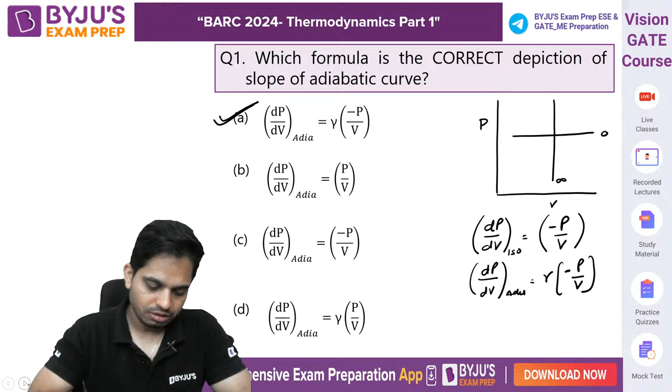In an isentropic process, the pressure P of the gas varies with temperature. We have an isentropic process, and it is saying pressure and temperature are related as P equals K T to the power 5 by 2, where K is a constant. What is the ratio gamma?

Adiabatic is also called isentropic? No. Reversible adiabatic is called isentropic, not just adiabatic. You cannot call adiabatic isentropic by itself; it is not isentropic. Reversible adiabatic is isentropic, got it?

So I have to find out gamma. Now how do you find it out? I know that for an isentropic process...

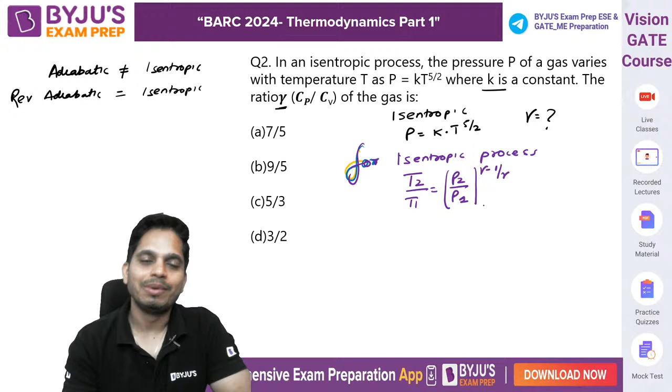For an isentropic process, what is the relationship between pressure and temperature? Can I write T2 by T1 equals P2 by P1 to the power gamma minus 1 by gamma? This is the relationship. So can I also write P2 by P1 equals T2 by T1 to the power gamma upon gamma minus 1?

So this can be written as P equals K T to the power gamma upon gamma minus 1. Now if I compare my equation A and B, I can equate gamma upon gamma minus 1 equals 5 by 2. Yes, you can do that.

So gamma, how can I find it out? 2 gamma equals 5 gamma minus 5. So if I write 5 gamma minus 2 gamma equals 5, then gamma equals 5 by 3. What is the answer? 5 by 3, the answer is 5 by 3.

Yes, clear? Guys, please contribute. Clear?

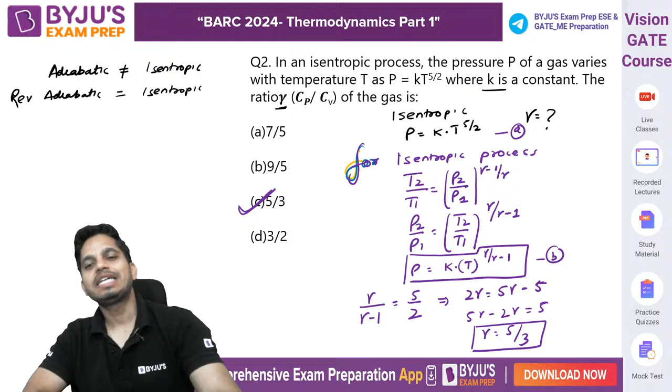We have just seen the ratio of absolute temperature T2 by T1 at two different states in an adiabatic process. What is the correct option? Just now we have seen this - how T2 by T1 is related to P2 by P1 for adiabatic process. Although this question is not absolutely correct, it should be reversible adiabatic. So how is it related? Gamma minus 1 by gamma, that is option B.

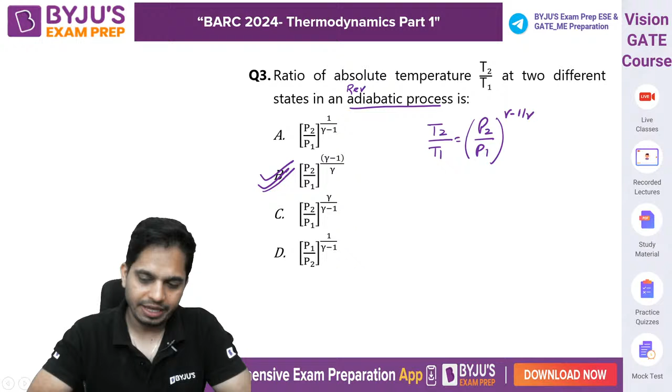Next question. A piston of diameter 0.1 meter expands over a stroke of L equals 0.2 meter under constant gas pressure of 2 into 10 to the power 5 Pascal, that is Newton per meter square. You have to find out the work done by the piston. So very simple, work done for isobaric process is P into change in volume.

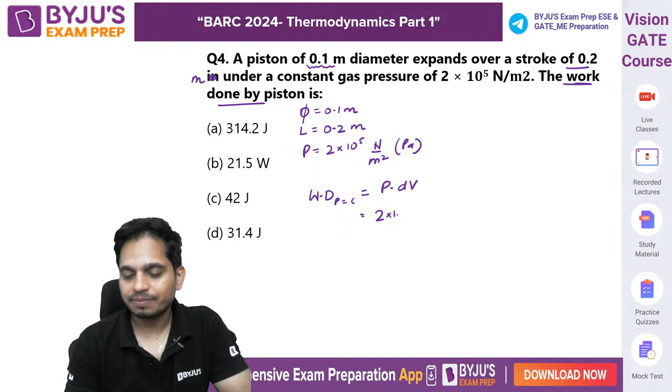P into change in volume. Now pressure is already given to me. How can I write change in volume? By area of piston and the distance that it has traveled. So area is pi by 4 into phi square into length. So the answer you will get is 314.2 joule is the work done in this process. Very good.

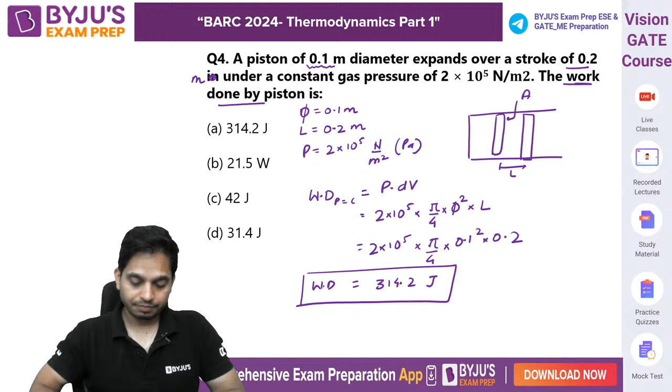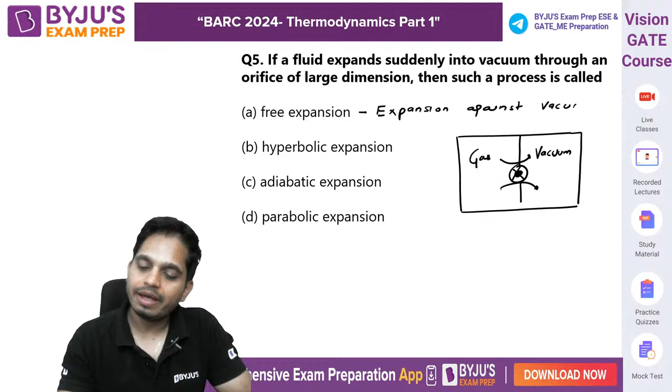Let's move on to the next question. Very simple question: if a fluid expands suddenly into vacuum, this is what? Expansion against vacuum through an orifice of large dimension. So let us say I have an orifice here, here we have gas, here we have vacuum. So what do you call this process? Free expansion - expansion against vacuum. If I open this orifice and gas expands against vacuum, it is called free expansion.

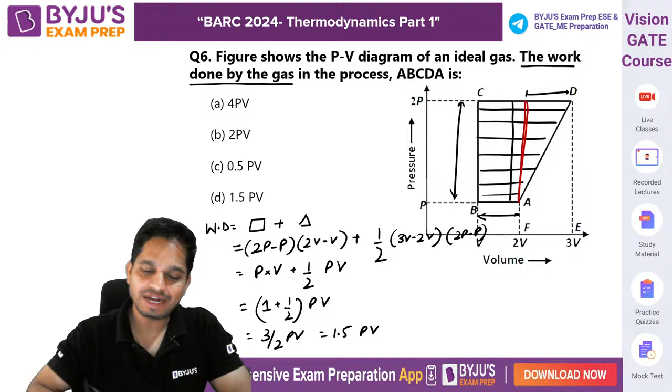What is the area of triangle? Half base into height. So base is 3V minus 2V and 2P minus P, so this is also half PV. So that is 1 plus half PV, 3 by 2 PV, 1.5 PV. Yes, 1.5 PV is the correct answer. This is the correct answer.

The work required for compression in a closed system increases - if work of compression you have to increase, then what is the relationship with N? You can do it two ways. You can write the formula: work of compression equals P2V2 minus P1V1 upon 1 minus N. Either you can do it like this, or you can draw a PV diagram as well.

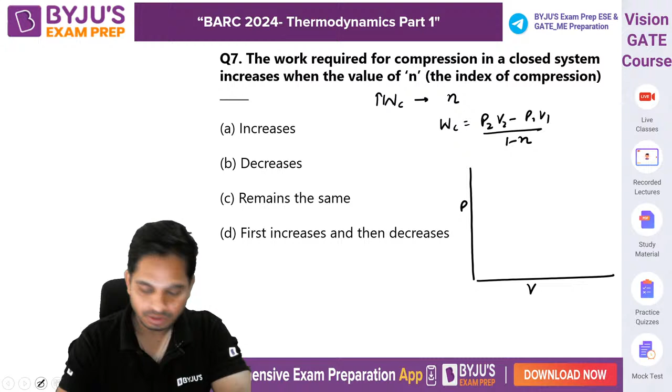What is the compression quadrant? This is the compression quadrant. And how do you give compression work? Area below the curve. So if I increase N, you see, N is giving me slope. If this has a lower slope, that means lower value of N. But if I increase the slope, then I will have this area. Higher N means higher area below the curve, means higher compression work, you have to give higher compression work.

So if N increases, work or area under the curve increases, that means compression work increases. So you can say it like this, or you can say if N is increasing, this whole thing is going to decrease and compression work is also going to increase. Got it? You can see it either way. Clear?

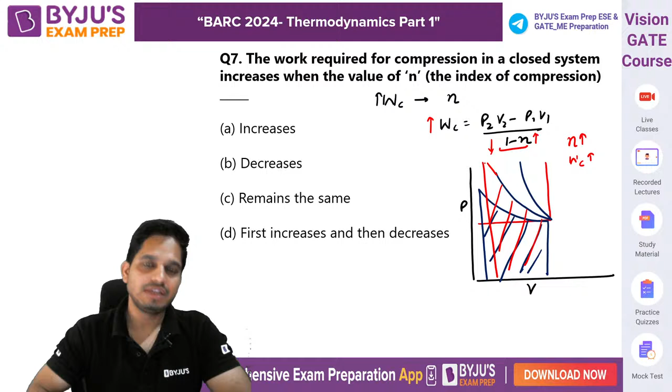Quickly, a PV diagram is given. This is the pressure-volume diagram. I have to tell what is the correct option in the PT diagram, in terms of pressure-temperature. Which option is correct? And this process AB is given as isothermal.

So very simple concept. If I have to draw a pressure-temperature diagram, then I am sure about one thing: BC will be a horizontal line, and AB will be a vertical line. Then only temperature will remain constant, and here pressure will remain constant. So if any diagram is satisfying this condition, you can say that is the correct PT diagram.

Is it clear? So which option is satisfying this condition? Option C. You see, B to C is constant pressure and A to B is constant temperature. Here A to B I cannot draw like this, this is wrong. Similarly, in other options A to B is constant pressure again, so this is not correct.

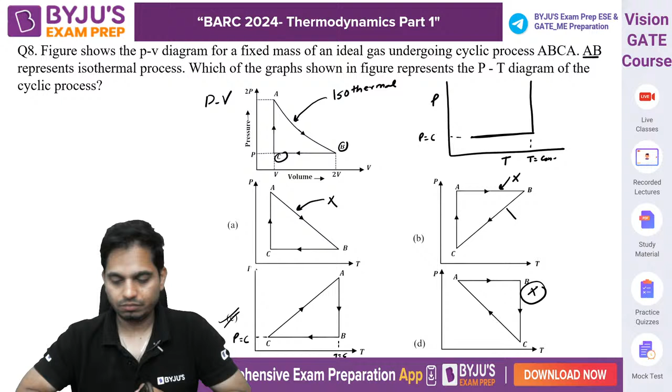Chalo. The ratio of specific heat at constant pressure to the specific heat at constant volume for a triatomic gas - basically it is asking, sir tell me gamma for a triatomic gas. Can you tell me? I hope that you know...

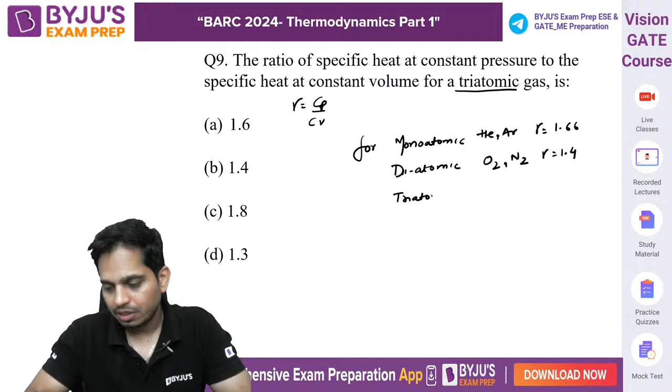...that for a monoatomic gas - for example helium, argon - gamma is equal to 1.66. If you have a diatomic gas, for example O2, N2, gamma is equal to 1.4. And for triatomic, for example ozone, CO2, gamma is equal to 1.33.

So what is the right option? D is the right option.

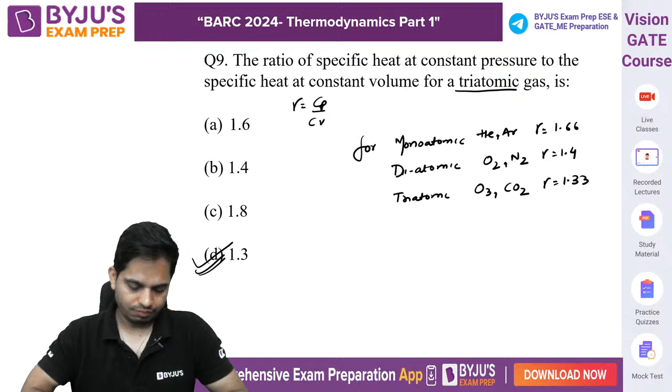Charles law. What does Charles law state? What does it tell you? Charles law gives you the relationship between volume and temperature at constant pressure, and it tells you that volume by temperature is constant.

So which option is correct? D is correct. Very good.

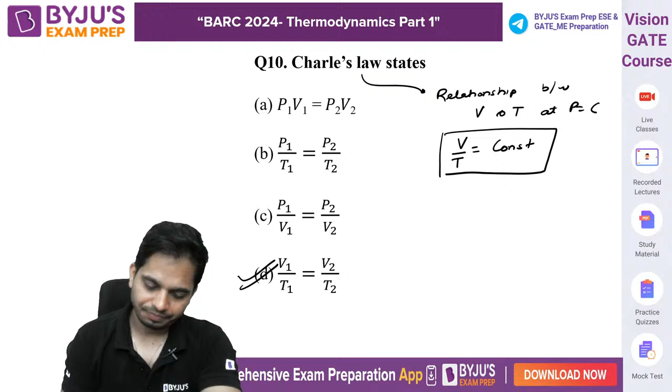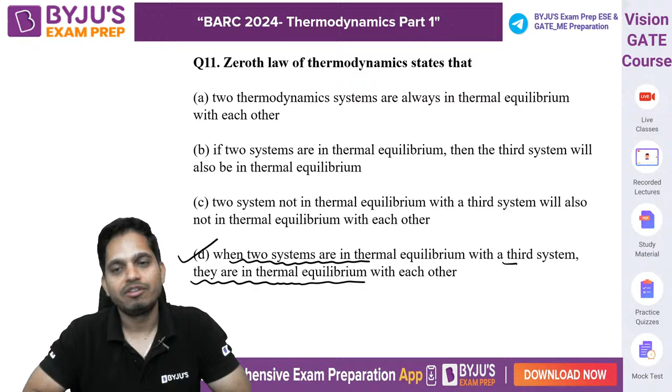Okay, chalo. Change in enthalpy in a closed system, that is DH, change in enthalpy, is equal to heat transferred if a reversible process takes place at what - constant pressure, temperature, volume, or internal energy?

Yes, D is correct in the last question. What is correct here? It is true for constant - constant what? It is valid for constant pressure. And dU is equal to dQ for constant volume.

Yes or no? You should know this, guys.

Internal energy associated with kinetic energy of molecules is - nuclear energy, chemical energy, sensible energy, or latent energy?

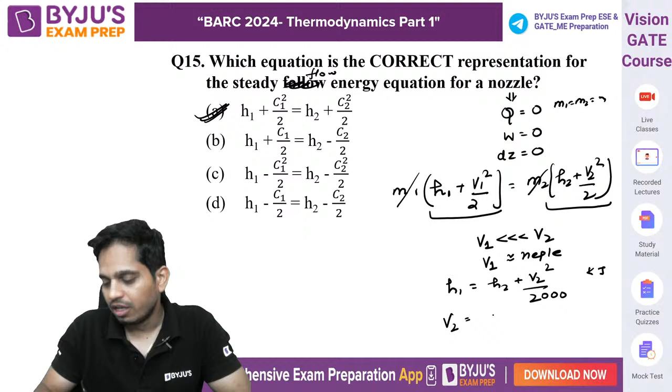So V1 can be neglected. So I have H1 is equal to H2 plus V2 square by 2. So V2 is equal to, now if I need to write this in kilojoule, then I have 2000 here. So it will be 2000 times H1 minus H2. So I can write it directly: V2 is equal to under root of 2000 times H1 minus H2. So 2000 into 0.2 is equal to 400, is equal to 20. What is the answer? 20 is the answer.

Yes? Yes. Chalo, next.

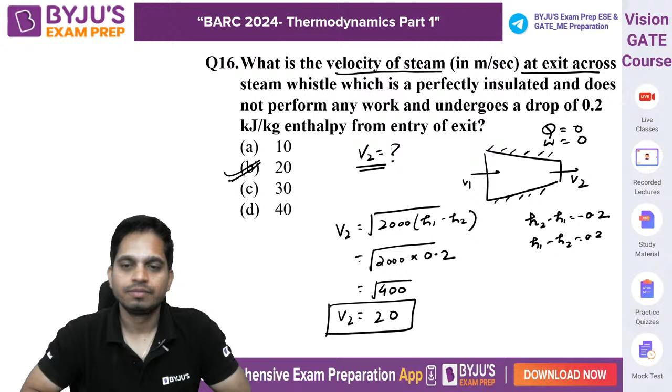Which gas can attain the highest efficiency for the same compression rise? For same pressure rise, highest efficiency. So how will you get highest efficiency? By efficiency is equal to work output upon heat input, so if work output is max, if you increase work output, efficiency will increase. Now, how will you get work output?

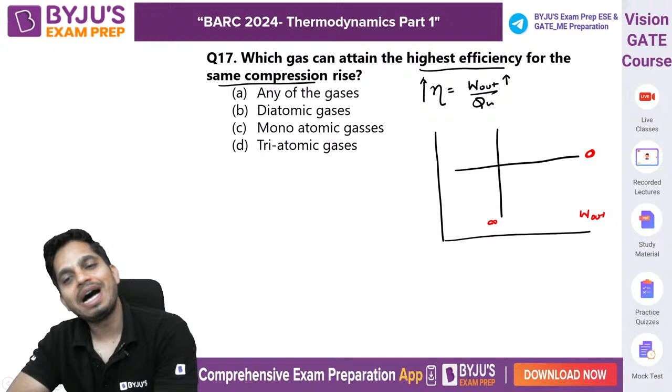Work output can be seen by the curve. You see, here slope is 0, here slope is infinite, and this quadrant will give you work output because it is expansion. Now, yes, monatomic is correct, very good. So if the slope is high, now slope is increasing in this direction. So as you can see, this will be your monatomic gas.

What is the value of N for monatomic gas? It is 1.67. For same compression rise, it is saying, okay, for same compression, so basically you need minimum work.

Yes, so basically we will see it here: 0 to infinite, and as you can see, if the value of N is maximum, the work will be maximum. We have already seen this. If the value of N increases, work increases. So if the value of N is maximum, which is maximum for monatomic gas, for diatomic it is 1.4, for triatomic it is 1.33. So as you can see here, you will get the maximum one as monatomic, so you will get C as the option, C will give you maximum work output.

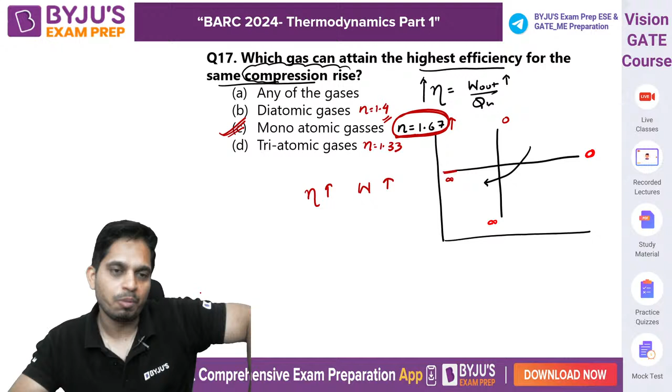Okay, chalo, next: isothermal compression is the most efficient but is not practical. We have already seen isothermal compression is the most efficient. Why? Because you need to give minimum work. Compression is this side. In the PV diagram, this is constant pressure, this is constant volume, this is isothermal, and this is adiabatic.

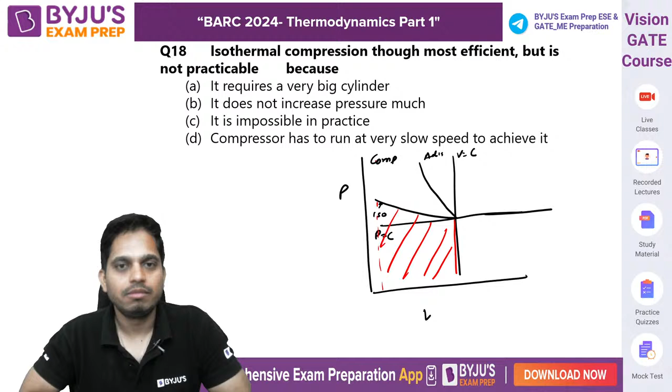Now in isothermal compression, we have to give minimum work. This is minimum area, so minimum work is needed. So isothermal compression is always most efficient because you have to give minimum work.

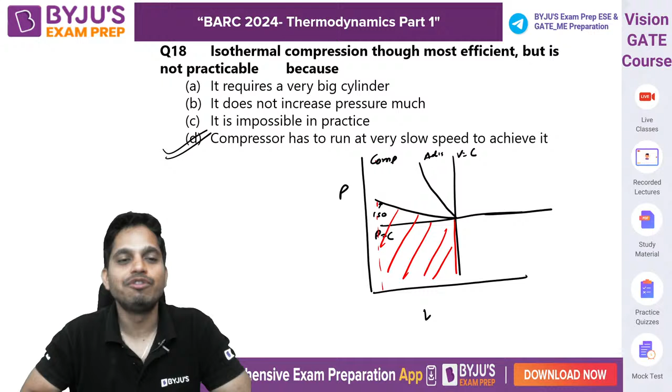But why can't we use it? Because isothermal process is done in a very, very slow manner, so that no friction will be there. If you move your piston faster, friction will be there and the process cannot be isothermal. So you do isothermal process at infinitely slow speed, and that is not practical in actual systems. If you want isothermal, the compressor has to run at very slow speed to achieve it, which is not practical.

For a given system, if heat is added, heat is denoted by Q and work is denoted by W, then what is the cyclic integral of dq minus dw? Cyclic integral for a closed system will be what? Quickly.

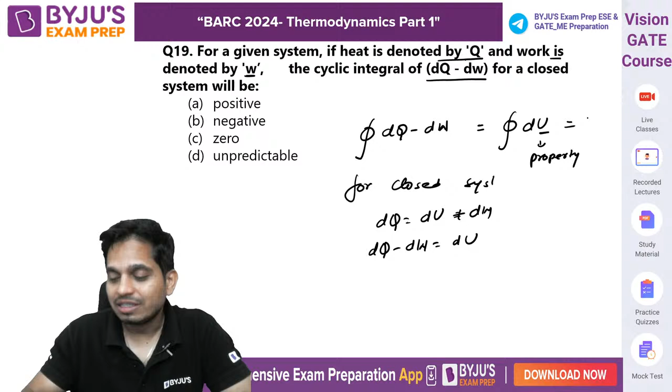It is 0. Why? For a closed system, we know that dq equals du plus dw. So dq minus dw equals du. So I can write it as cyclic integral of du. And u is a property. Change in property for a cycle is 0. We know this, right?

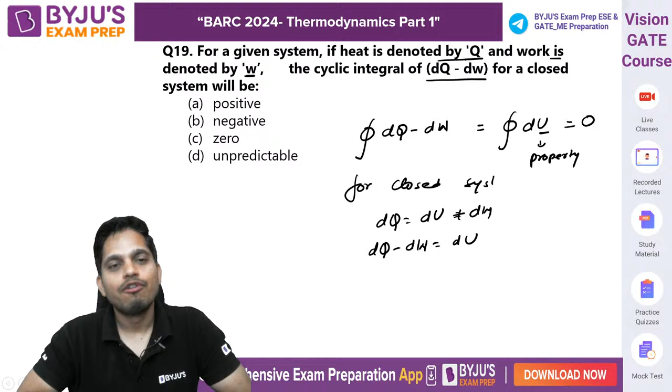Clear? If they ask for a process, then what will be the integration of dq minus dw? For a process, not for a cycle. What do we know? We know that dq is always greater than dw. This is your second law. You have to give more heat. dq is always greater than dw, and therefore this integration will always be positive. But this is for a process, not for a cycle.

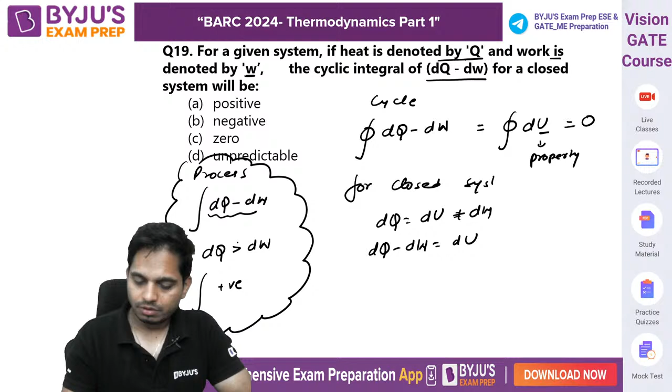So for a cycle it is 0. A liquid of mass 1.5 kg and specific heat 3 kilojoule per kg Kelvin is stirred, causing the temperature to increase by 10 degrees Celsius. What is the work done for the process if the system is insulated? That means there is no heat transfer.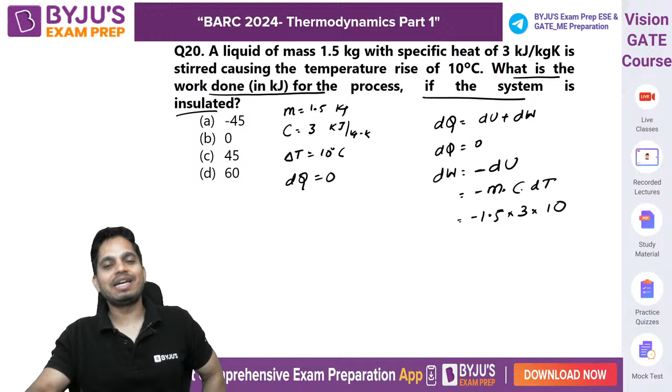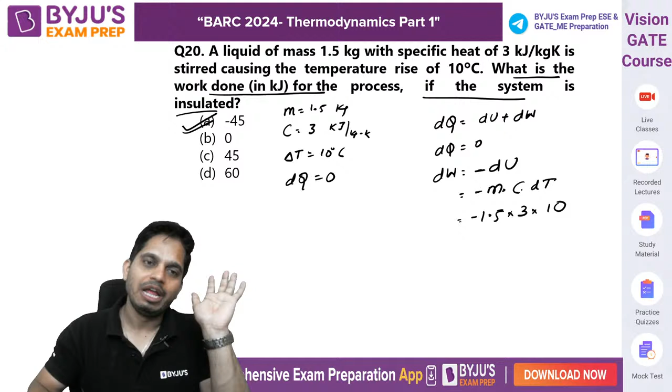So we know dq equals du plus dw. Now dq equals 0, so dw equals minus du, that is minus mc delta t: minus 1.5 into 3 into 10. What is the answer? It is minus 45. You forgot the minus. You are doing stirring work, which means you are giving work input. If minus is given, you have to take care of it. If minus is not given anywhere, then 45 is correct, but because minus is given in the question, you have to write minus 45.

The heat interaction of the system is a function of temperature, like this. If the system does work of dw by dt, that is kilojoule per Kelvin, given as 2 kilojoule per Kelvin, find out internal energy per degree Celsius. This I need to find out.

So I have the equation dq equals du plus dw. Let me differentiate it with respect to temperature: dq by dt equals du by dt plus dw by dt. Now I have to find this out. If I differentiate this equation with respect to temperature, I get 1 equals du by dt plus 2. So du by dt equals 1 minus 2, which is minus 1 kilojoule per Kelvin. This is the answer.

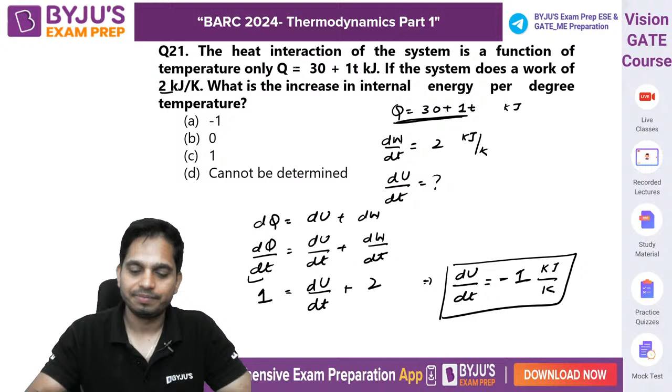Okay? Last 4 questions left. A gas is compressed frictionlessly from an initial state, this is your initial volume and initial pressure P1, to a final state, this is your V2 and P2. There is a transfer of 40 kilojoule of heat from the gas, that is, dq equals minus 40, and a drop of 20 kilojoule in internal energy.

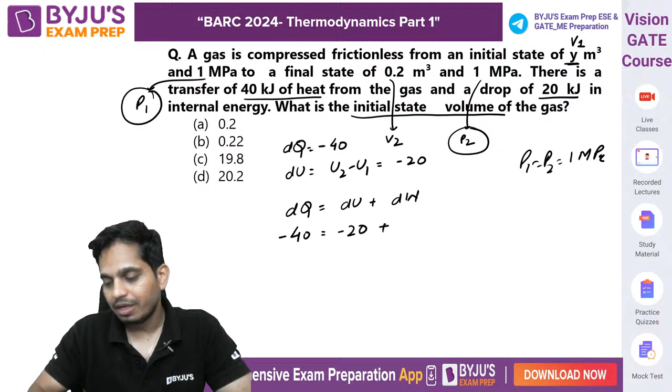Now if drop is happening, du equals u2 minus u1, that means it is minus 20: u2 minus u1 is minus 20. What is the initial state volume of the gas? So very simply, dq equals du plus dw. Now P1 equals P2 equals 1 megapascal, so it is a constant pressure process. So I can write minus 40 equals minus 20 plus pressure into V2 minus V1.

Minus 40 equals minus 20 plus 1000 into 0.2 minus y, so you can calculate y. How much is y?

B is correct. B is correct. 0.22 meter cube. Very good. 0.22 meter cube. Got it? Clear hai?

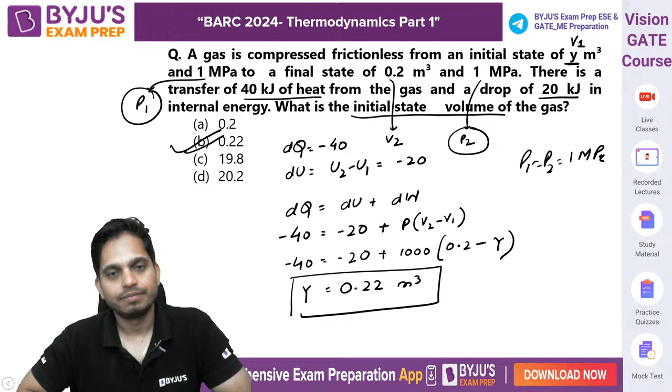Chalo, so that means two gases are mixing. One has number of moles Na, pressure P, volume V, temperature T, and another gas is also mixing with number of moles Nb, pressure, volume and temperature are same.

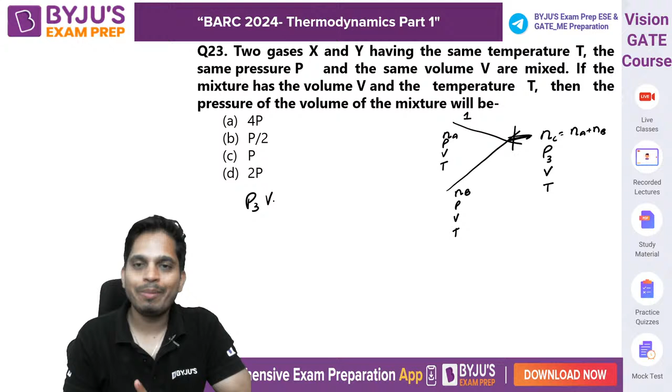So when they are mixed, it will come out as N3, which is equals to Na plus Nb. Pressure I don't know, let us say P3. Volume is same, temperature is same, they have told us that. So I need to find out pressure. P3, volume remains same. PV is equals to N3 RT, so P3 is equals to N3 RT by V. Now what is N3? N3 is equals to Na plus Nb.

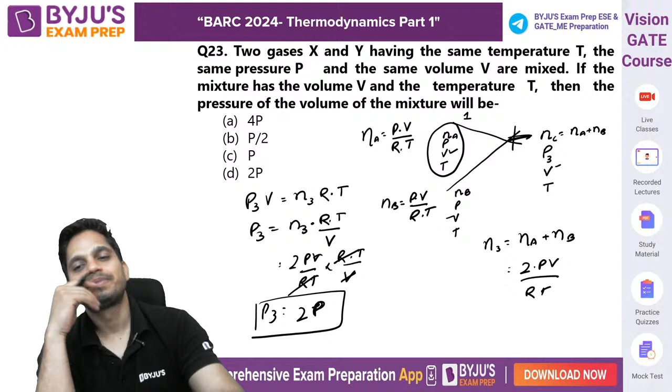Now what is this? What is Na? You can apply this here. So Na is equals to PV by RT. Nb is also same, pressure is same, volume is same, RT. So you can write 2PV by RT. Substitute 2PV by RT into RT by V. What is the answer? P3 is equals to 2P. Kitna aaya? 2P. Got it? Chalo, so 2P is the answer.

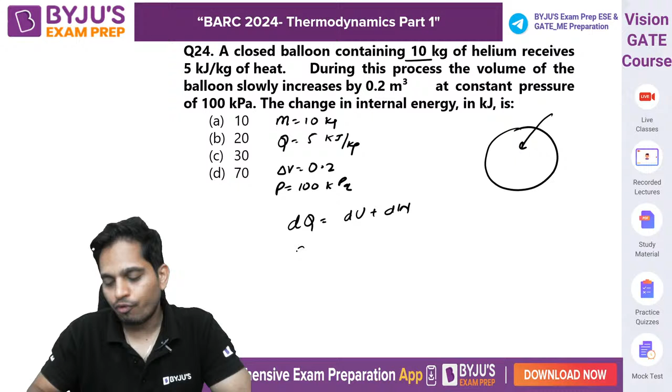dQ is equals to dU plus dW. I have to find out dU, so it is dQ minus dW. Mass into heat, it is kilojoule per kg, so I have to multiply it by mass. Pressure into delta V. So it is 10 into 5 minus 100 into 0.2. How much is the answer? 50. Sorry, just one second, it will be minus. Minus 50 minus 20, how much is it? 30. Yes?

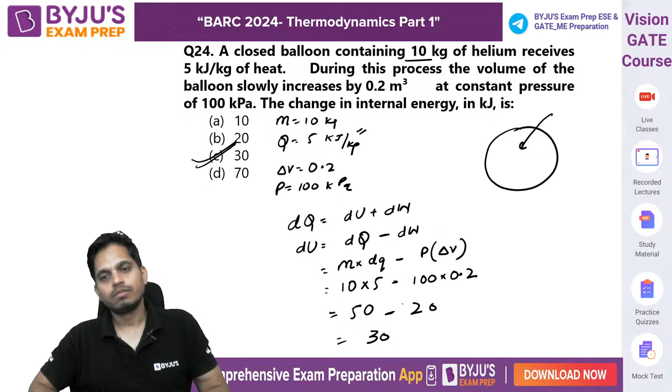Aa raha hai nahi? Clear hai? Chalo, let's come to the last question for today.